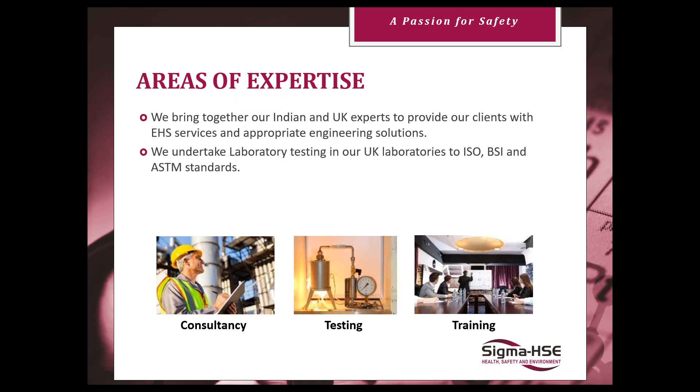So that's where we are. What do we do? We're basically experts in anything to do with process safety, so that's consultancy on all aspects of process safety. But we also have the luxury of having test laboratories, accredited laboratories, for really getting to understand the flammability and combustibility characteristics of gases, liquids, vapours, and combustible dusts. We also have the capability of doing chemical reaction hazard testing, so calorimeters, DSCs, ARC, all of that sort of stuff. And that feeds into the consultancy arm with the advice we can give to operating companies. We also do a fair amount of bespoke training for companies on many different aspects of process safety, including fire and explosion, which is the subject of today's presentation.

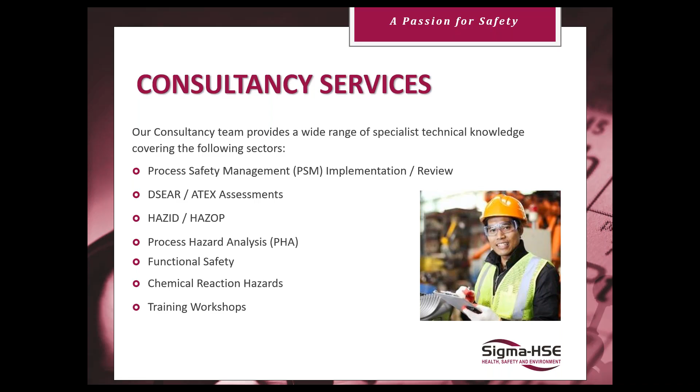So you can see from this slide the sorts of things that keep us busy, earn our money, and hopefully make the process industries a safer place to work, and of course complying with the necessary legislation. As I've said, we have this luxury of having the testing laboratories, so fire and explosion properties of all types of substances. We're also experts in electrostatic properties, so we can determine resistivities and look at electrostatic ignition probabilities and all that sort of thing. So we do tend to be able to help industry in quite a large way.

So, what we're trying to do here today is give you some information on this subject called Hazardous Area Classification. This subject is all to do with trying to prevent or manage substances and processes that can burst into flame or explode. Okay, that's what we're trying to do.

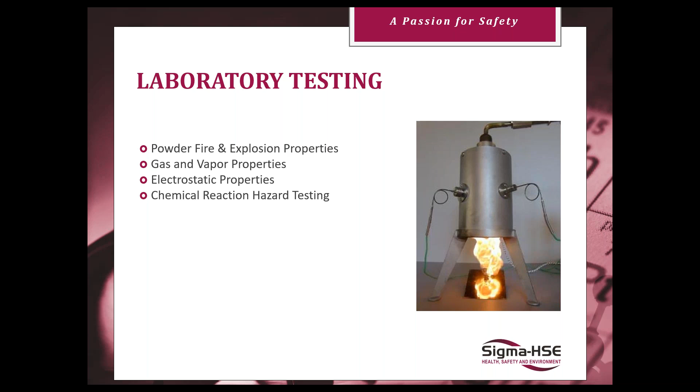Just a couple of examples, because you'll all be familiar with the fire triangle. So before something can burst into flame, we need a fuel. We also need air or oxygen, and those need to be in certain proportions to create this thing called the flammable atmosphere. Within Europe, we talk about explosible or flammable atmospheres, and it's this mixture of fuel vapours with air.

That fuel, of course, can be either vapours from liquids, gases, or combustible solids in the form of dust clouds. The third part of the triangle is an ignition source. So just like with all of these triangles, if we can take away any one of those 3 points, either fuel or the air or the ignition source, then we don't burst into flame and we don't have the potential for explosion.

Piper Alpha is just one example, which you'll no doubt know all about as process safety professionals. One of the things was a deluge system was activated by the gas leak, and this resulted in the ingress of deluge water into a light fitting, which was a protected light fitting, but because we had ingress into it, it was no longer explosion proof. We got an electrical short circuit and the generation of a spark. Now, I'm not saying this was the only potential ignition source for Piper Alpha, but it's just an example in relation to the topics we've been talking about.

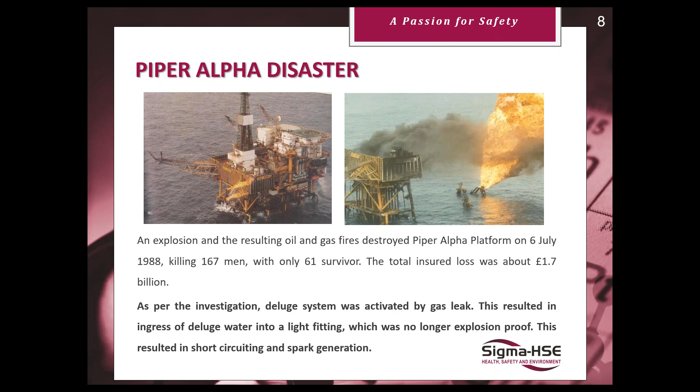Another one, especially our American audience will understand, is the Danvers plant explosion back in 2006, where essentially we overheated a flammable liquid because we left the steam on inadvertently. That generated vapours. The ventilation system had been isolated, but it's very difficult when dealing with fires and explosions to ensure we eliminate all potential ignition sources all of the time. So under such circumstances where you've got this flammable atmosphere present, eventually, given sufficient time, it's likely to come across an ignition source, and we have the confined vapor cloud ignited by a non-rated fan, resulting in the consequences of that serious event.

So what we're trying to do in hazardous area classification is try to prevent this from happening. These are serious things, so you can envisage that there is legislation present within our nations to deal with these sorts of events, to try and prevent them in the first place, or if they do occur, ensure the explosion or fire isn't as bad as it could be. What we're essentially trying to do is break that fire triangle in its simplest form.

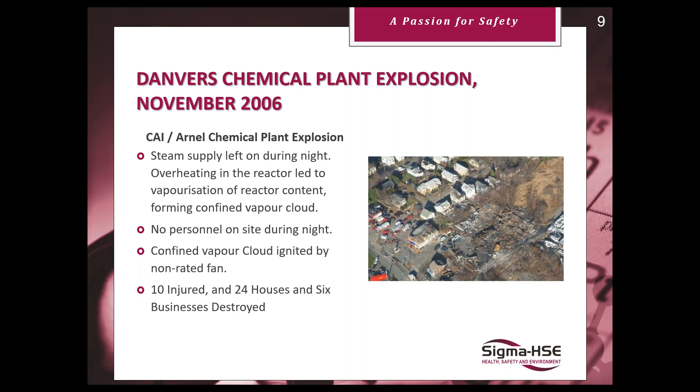Within the UK, we have a set of regulations called the DSEAR regulations, standing for Dangerous Substances and Explosive Atmosphere regulations. These are substances classified as flammable or combustible, and if they mix with the air can produce this explosive atmosphere.

What the regulations essentially require us to do is carry out this thing called a hazardous area classification, to determine where we can get mixtures of fuel vapours or fuel dusts with air, and how big those flammable or explosive atmospheres could be. We'll talk later about what's called the extent of the flammable atmosphere. Basically, the system is built on a yes-no answer, which says if a flammable atmosphere is present, then that's a hazardous area, and we define that as a zone within the UK and Europe. Outside of that area or zone, where the flammable atmosphere is below the explosive concentrations, it's non-hazardous.

So we look at where we can generate mixtures of fuel and air, and sometimes that'll be internal to equipment, for example within a storage tank containing a flammable liquid with a low flash point. If it's an atmospheric storage tank and open to the air, then as we draw off liquid from the tank, we'll be drawing in air, which will mix with the vapours given off from the liquid surface, so we'll have a flammable atmosphere.

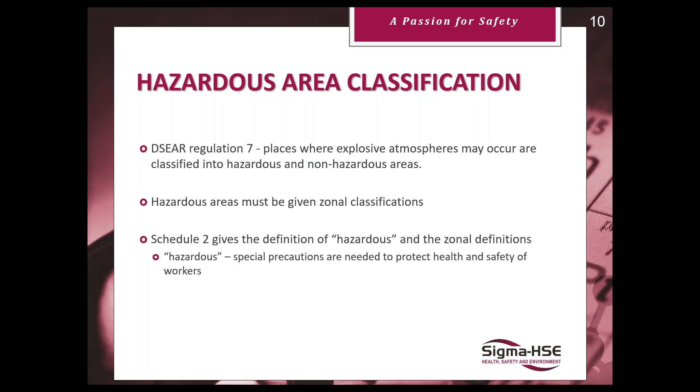In the US, there are really two overall guiding documents: NFPA 497 for any time you're handling a flammable liquid, gas or vapor, and NFPA 499 if you're handling a material that has the potential to result in a combustible dust cloud.

If you know your process has these materials, you're required to go through and apply the NFPA code and determine if this area is classified. If so, per the requirements within NFPA, you're directed to NFPA 70, the National Electrical Code, which has specific requirements based upon the classification you derive through the methods within NFPA 497 and 499.

It will dictate what you need to do for an installation within whatever you've determined that area to be classified for it to be a safe installation.

It's a lot more judgment calls and best understanding of processes, as opposed to a yes/no list-based process. It involves a holistic approach of looking at process, size of process, potential leak points, what the material itself is, does it have exceptionally high ignition energy requirements, or is it something that can ignite really low. You go through, make these adjustments, find what NFPA recommends as a classification zone, and then apply that to your process.

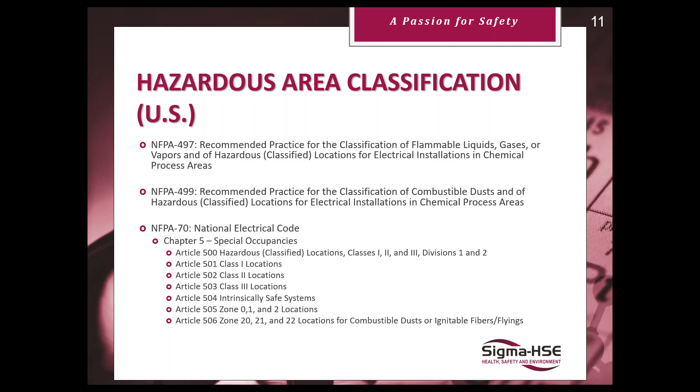The only time we won't have a flammable atmosphere within that tank is if we have a cold snap and the temperature of the liquid falls below the flash point.

But outside of that, around the vents, for example around the PV vent, that will most probably only be giving out vapours when we're filling the tank, when we push those vapours out. So in normal operation we expect those vapours to come out of there, but once it's static and we're not loading or unloading from the tank, we'll be in a static situation.

And then we have what's called another zone outside, which is essentially related to if we overfill the tank or spill the tank or whatever.

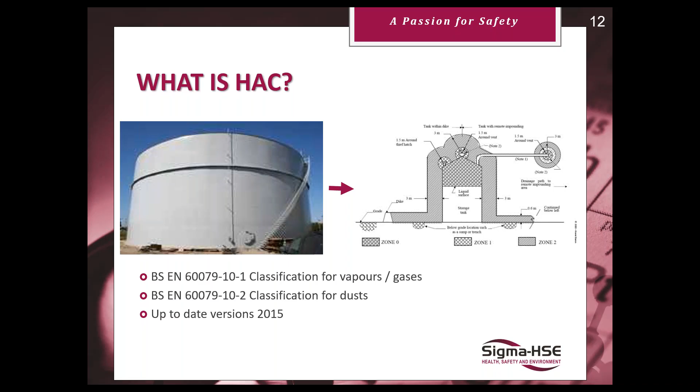Now, we've already talked about what the flammable atmosphere is. It's this mixture of vapours with air, and they've got to be within the proportions we know about, being the lower explosive limit or the upper explosive limit. So if we've got insufficient air, we're too rich to burn, we're operating above the UEL, the upper explosive limit. If we've got too much air, because ventilation is very good or whatever, we could be operating below the LEL.

So we've got liquids that can generate vapours primarily due to temperature on the flash point, or we can do it from a vapour concentration point of view. But obviously, as we all know, those limits can widen as the temperature increases. Okay, and that's all that is illustrating.

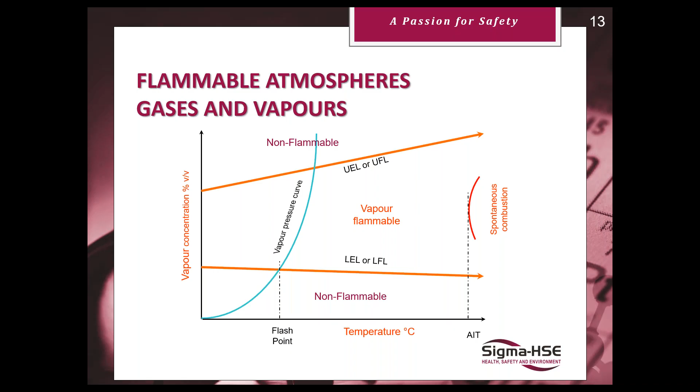Now, to be able to do this job properly, we need to understand properties of the substances we're dealing with. When we're talking about gases and vapours, these are the sorts of data that we need to understand. So flash point for liquids or gases, the flammability limits, the auto-ignition temperature.

Similar to the flash point is ignited by a flame or spark ignition, where the auto ignition temperature is a hot surface effect. So the auto ignition temperature is a lot higher generally than the flash point, often in the hundreds of degrees C. The gas group - we tend to classify various gases and vapours into one of three groups.

But this really relates to the ease of ignitability, or the minimum ignition energy necessary to be able to ignite certain substances. And of course, if we're looking at where our flammable atmospheres can be, then vapor density is important.

So when we're doing our hazardous area classification and developing those drawings, if we're dealing with a buoyant gas like hydrogen, for example, any release of hydrogen will be buoyant, will mix with the air, so the flammable atmosphere will be buoyant and go up. Whereas for solvent vapours, typical industrial solvent vapours, the vapour density will be heavier than air, so they'll tend to sink to the ground. So of course that will impact our hazardous area classification.

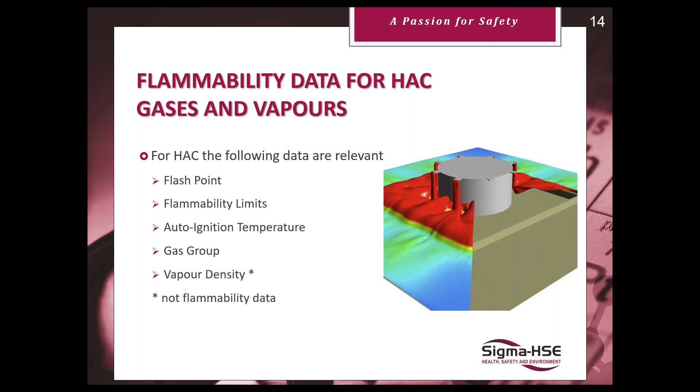Now, I've talked about gases and vapours, but of course powders or combustible dusts can burst into flame or explode. But generally, if there's good mixing, good suspension in air, clearly, just as with vapours and gases, we need to have a powder that is capable of acting as a fuel. And by that I mean it's capable of reacting with oxygen, because that's really all combustion is.

An ignited event is a combustion reaction. All combustion reactions are the same - it's the material reacting in oxygen. So if that material is already fully oxidized, then it won't be able to react with oxygen, it'll be inert. Something like chalk or sand or cement, fully oxidized substances, cannot form a flammable or combustible cloud.

The concentration's got to be within explosible limits, what we call the minimum explosible concentration of dust in air, very similar to the LEL and the UEL. But because we need that suspension in air, what we found is that we need to have a particle size distribution of the powders to be less than 500 micron. Less than 500 micron has an effect on the reaction dynamics of the combustion reaction. It also has an effect on its capability of generating a dust cloud, getting this intimate mixture with the air.

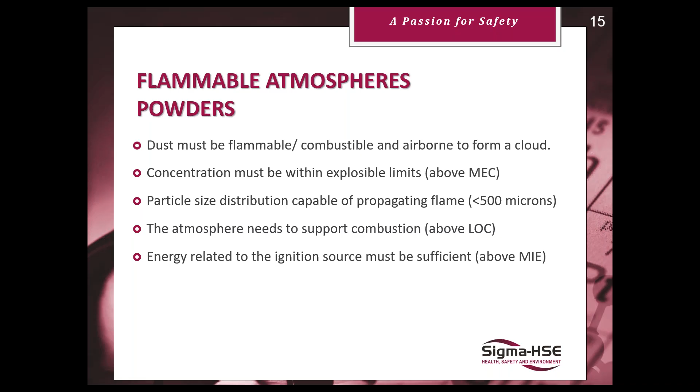But for combustible dust, because it's very particle size dependent, really it's testing. We can't really calculate the flammable atmospheres and things like that. We need to actually do the testing itself to get that sort of information, which is what's illustrated here. So we have tests where we can determine whether or not a powder will be combustible.

That's known as the AB classification, where we create a dust cloud and put a very large energy source through that dust cloud and see if that will explode or not. We can determine the minimum explosible concentrations, particle size, the minimum ignition temperatures of both a cloud and a layer of powder, and its electrical resistivity. So these are just some of the tests that we typically use to get an understanding of the substance, as to how likely it is to form a flammable atmosphere and how easily it can be ignited.

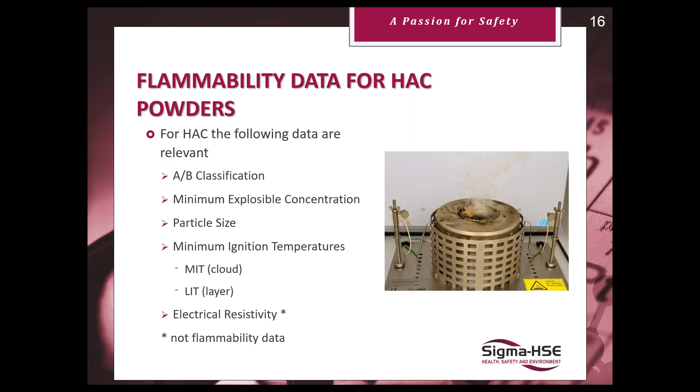And again, there's guides out there for us. There's a standard, another part of the standard that tells us about this, you've seen these before, I presented them before, but there's also industry codes as well. So the Energy Institute in the UK, which is essentially looking at the storage and safe handling of highly flammable liquids and liquid fuels, Model Code of Safe Practice, Part 15.

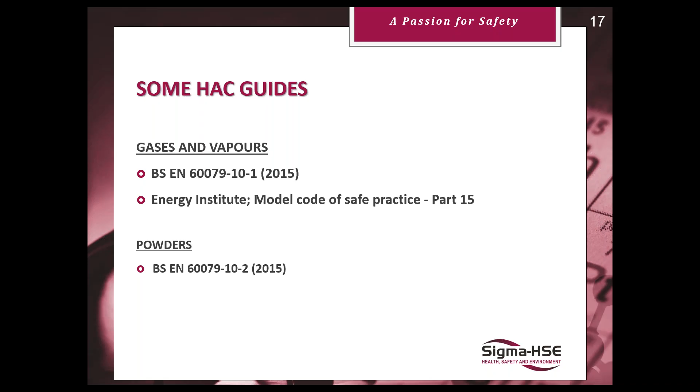You'll have similar things in the States, which Andrew will take you through now. Yeah, again, within the States, the majority of all the information is contained within the NFPA requirements. I'll walk you through for gas and vapors in 497, definitions, classifications, provide you with those example diagrams, and then give kind of explanatory material walking you through why those diagrams may apply to your process, or if you know there's a reason for it not to apply and something else will be helpful.

And then again, it directs you to NFPA 70, which will tell you, all right, you're going to have electrical installations in these areas that you've determined need to be classified. Here's what you need to do to ensure that those electrical installations don't provide a potential ignition source. And then it's an identical process for powders with NFPA 499 instead of 497. And again, pushing you through to NFPA 70 and the specific requirements.

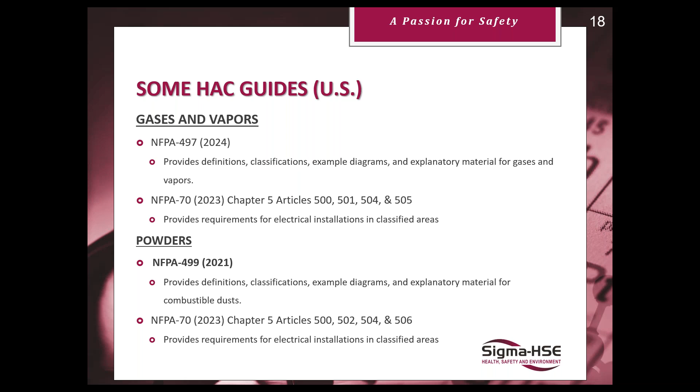Okay, so you can see it's very similar. So, what are we trying to do? What's the philosophy behind this hazardous area classification? We're talking about zones, and I've said before these are risk-based zones, because we're looking at the probability of a flammable atmosphere occurring simultaneously with the probability of an ignition source being present at the same time.

So, if you like, from a risk point of view, what we're trying to do is reduce the risk of having an ignitable event, and that risk is a combination of the likelihood of having a flammable atmosphere present and the likelihood of having an ignition source present at the same time.

So therefore, clearly it means that if we've got a flammable atmosphere there present continuously, like for instance in the headspace of a tank with a low flash point liquid in an atmospheric storage tank, then because the flammable atmosphere is there practically continuously, most of the risk reduction comes from reducing the probability of an ignition source being present.

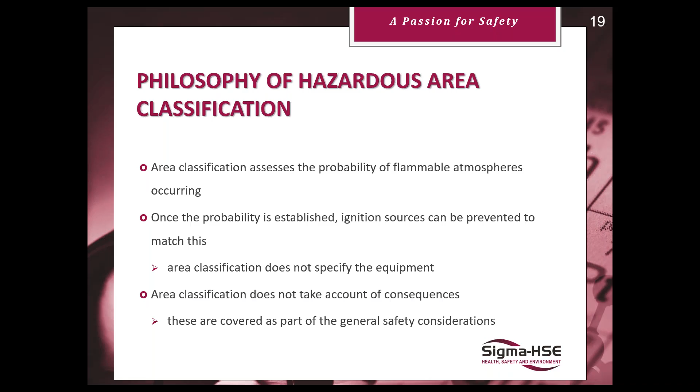So what's the approach then to actually determining these zones? We've got to find out, we've got to understand the materials we're playing with, whether or not they're capable of bursting into flame or explosion and how easily, but we've got to identify where these flammable atmospheres can be. Generally they can be either inside equipment, or if equipment fails, we have leaks or spillages. So we need to identify these sources of release.

Any vapours released from those sources will be dispersed due to ventilation characteristics, either natural ventilation or specific forced mechanical ventilation. Our next task is to determine what we call the grade of release.

Is that flammable atmosphere there continuously? Is it there in normal operation? Or is it there infrequently? Or you can think about it another way.

Continuous is obvious, something like a flammable liquid being present at temperatures above its flash point in a containment system would be continuous. A vent, for example, will only generate that flammable atmosphere when the vent is in operation. So when we're filling the tank, we'll be pushing vapours out from that tank. When we're emptying the tank, sending it off to process, we're pulling air into the tank.

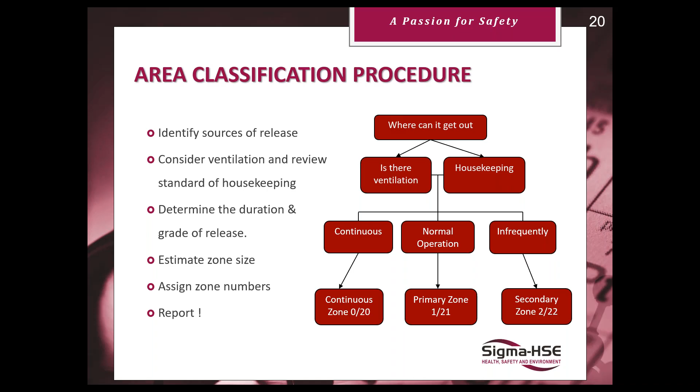And Andrew will now illustrate how that's done in the US.

So in the US, the start of the process is the same. You're looking at your process and you want to know where is there the potential for there to be a release of combustible material. And then you go and you gather information on the facility history and the process information.

Facility history, you want to look at, is there a tendency for there to be leaks during maintenance activities? Is there a high rate of spillage? Is there anything in the historical documentation of this facility that leads you to believe that releases are going to be more likely than they would be on the average?

And then within process information, you want to look at volumes of materials being handled, pressures that the process operates at. Is it a high pressure? In that case, it's going to be a larger zone than if it's a low pressure or an open system. You want to look at flow rates and all of your process parameters, and that will help you dictate what makes sense for our zone.

Then you go and there's the classification diagrams listed in NFPA, and you compare release source and your process details, and you make sure you find one that matches. And then you match up your diagrams looking at your likelihood of ignitable mixture being present, your potential for combustible material to be transported further. If you have trenches, pipes, conduits, ducts, something that can travel that combustible atmosphere away from the primary leak source, you want to make sure that you're using a classification diagram that represents that as well.

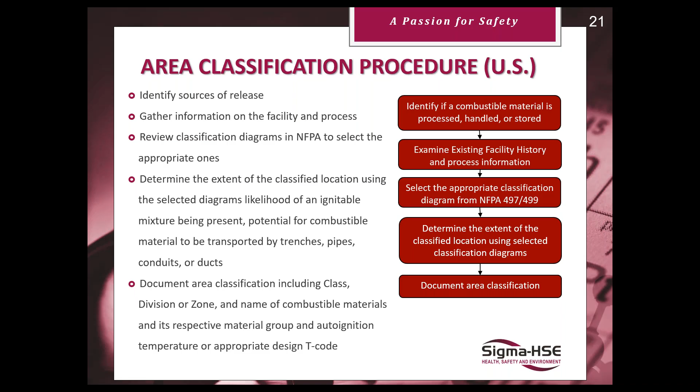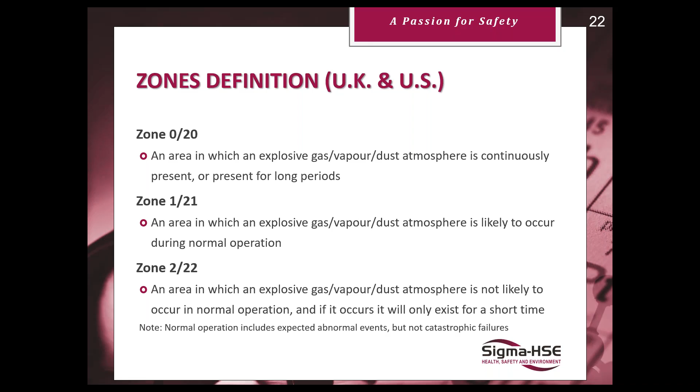And as I've already discussed the zonal classifications before, this just gives the proper definitions present within the standards, but hopefully you can see we use the same system in the UK or indeed in the US if we're talking about zones. But in the US we have an additional definition which Andrew will take you through.

Yeah, so US started with class and division before adding the zones. That's a relatively recent move to become a little more in line with European, but most places still use a class and division system. It's fairly simple.

Class 1 is going to be explosive gas or vapor atmosphere, and division 1 is going to be present during normal operation. Division 2 is under abnormal conditions. So it lines up a little bit with the zones, but rather than having the 0, 1, 2, division 1 kind of encompasses your 0 and your 1, but it's a different requirement technically. So if you've got something that's classified for a zone and you're using a division, it doesn't quite line up.

You need to make sure your equipment is Class 1, Division 1 certified, and then same with Class 2 for normal operation, or there being combustible dust present that could be stirred up. You've got an eighth inch thick layer on, say, the ground of your shop around your routing machine. If someone were to step and stir that dust up and there's an electrical spark in the area, there's the potential for ignition.

And then your Class 2, Division 2, it's only likely during abnormal conditions. So this would be if you've got a secondary event occurring, or there's a failure and a release during a maintenance activity, then you would expect to see your dust there. It's just a different way of viewing it as opposed to the zone method. But I think as the US moves forward, they'll probably end up stepping away from classes and divisions and moving more towards the zones in the future.

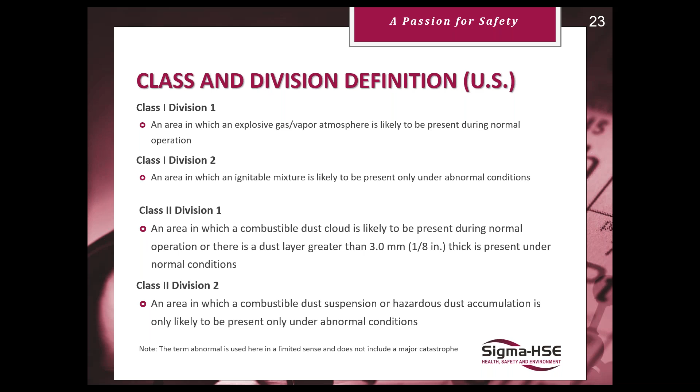So just to reiterate, we've got these different types of grade, whether the explosible atmosphere is there continuously or very frequently or for long periods, whether it's periodically there or on occasion during normal operation, or we only expect it because we're having leakages or spillages or some form of malfunction, this sort of thing.

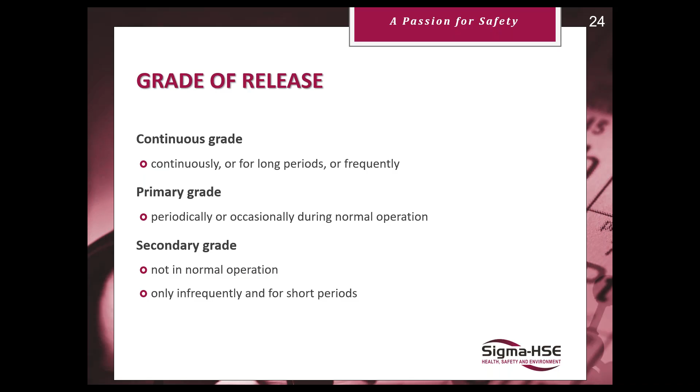And again, very similar in the US, although there appears to be some form of quantification to the volumes of materials. So within the US, we don't really look so much at grade of release as opposed to a size, pressure, flow for the process involved, and let that kind of dictate some of our volumes. We have the similar approach of combustible atmosphere always or expected present during normal operations and then occasional, but it doesn't feed in as much as your process equipment and piping details that will directly impact which methods of classification diagrams you're going to be looking at.

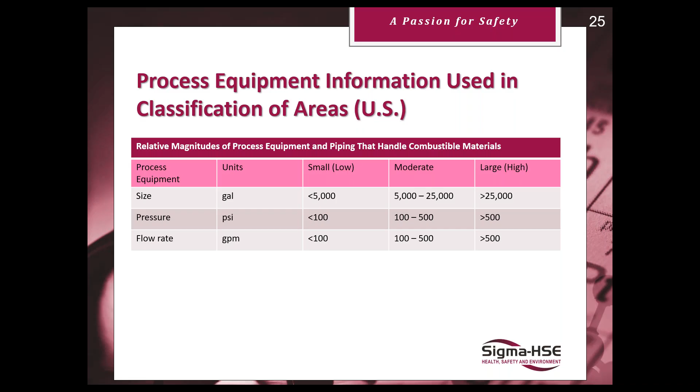So actually defining the zones is pretty easy once we've got an idea of the grade of release, because the grade of release determines what the zone is. The only thing that changes the extent of that zone is if ventilation is there and it's good and it has good dilution and it has good dispersion characteristics.

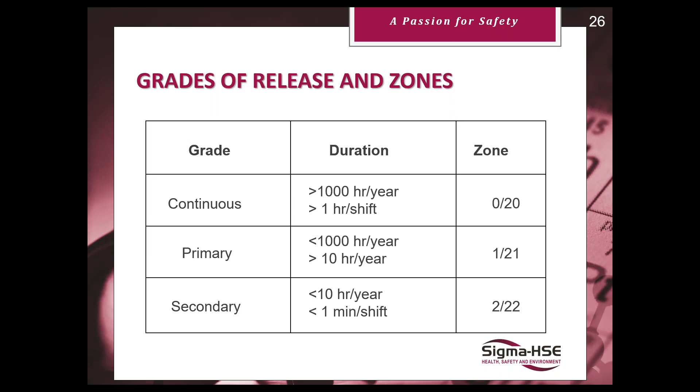So, for example, over an open container of flammable liquid where it's a continuous grade of release, if I've got mechanical local exhaust ventilation that's been designed where the airflow effectively reduces the vapor concentration to less than 25% of the lower explosive limit, then it remains a continuous grade of release, but the zone extent can be what's known as negligible extent. So the size of that flammable atmosphere is reduced down to a very small volume by virtue of having good ventilation and good availability of ventilation.

But there are different ways of determining the extent of the zones, the size of these flammable atmosphere zones. The easiest approach is the example approach. So that diagram I showed you before of the atmospheric storage tank with the zones around it, that exercise has been done by the industry and that's the accepted way. So you can simply, if you've got an atmospheric storage tank within a bund or a dike, and it's a low flash point material, your hazardous area classification is as simple as just taking that out from the standards or the guidance that's available and using that. You don't need to do anything else.

But there are calculation methods as well that can be used where you can determine things called release characteristics, where you can actually calculate or in fact use consequence modeling software to determine the extent of a flammable cloud, its shape and so on and so forth. So there's different ways of doing it. The simplest, though, is if it's already been determined by somebody else, is using that. And a lot of the guidance in Europe and in the UK has already got hazardous area classifications around typical pieces of equipment, mixers, pumps, vents, tanks, reactors, things like that, already being done. You just need to check that your situation is essentially identical to the situation of the example that's given.

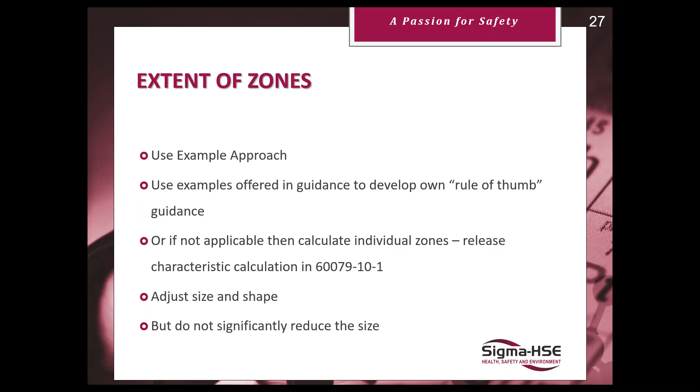Within the US, we don't currently have that calculation option. It's all going to be based on diagrams and best understanding of the potential releases, considering what the material is, the vapor density of the material - is it lighter than air, heavier than air? What the LFL is, your process or storage size, the size of your release, and your ventilation. Then you apply the diagram method and adapt that to what your facility needs and looks like.

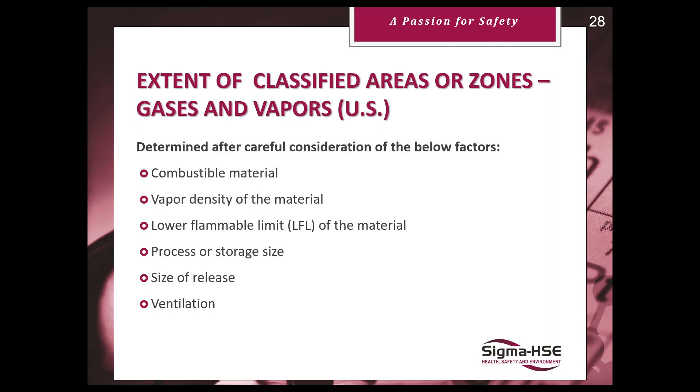We've got exactly the same sort of thing for dust. It's more difficult to calculate, but you can use the knowledge from when some of these events have happened. For example, if you drop a 25 kilogram sack of powder on the floor when charging it, to get the extent of the zone 22, you simply visually look at how far the dust has been deposited - is that 1 meter, 2 meters, or 3 meters?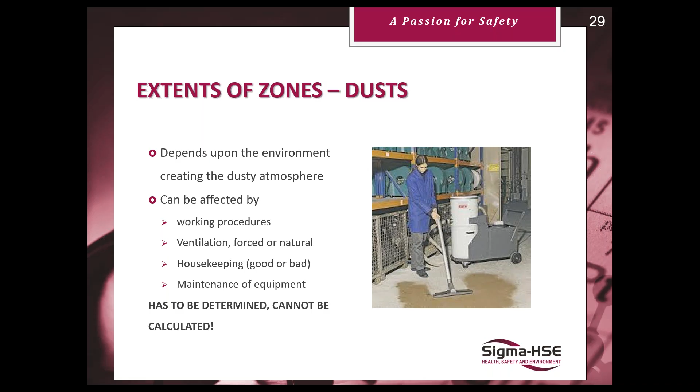It's more difficult to do from a calculation point of view. It can't be calculated - we need to use other sorts of extents.

The process for dust zones within the US is similar to vapor and gas. What affects your zone changes though - you're still looking at properties of the material, but now you're adding bulk density, particle size, particle density, what pressure it's stored at, and the size of a leak opening. Is it a release in the side of a super sack? Is it a pressurized pneumatic conveyance system with a pinhole, or a slightly bigger leak at a transfer point with a flex connection? How much can be released? Do you have dust collection in the area? What's your housekeeping process, and what's the potential for a hybrid mixture - do you have combustible gas and vapors mixed with your combustible dusts? Because that requires a different type of classification.

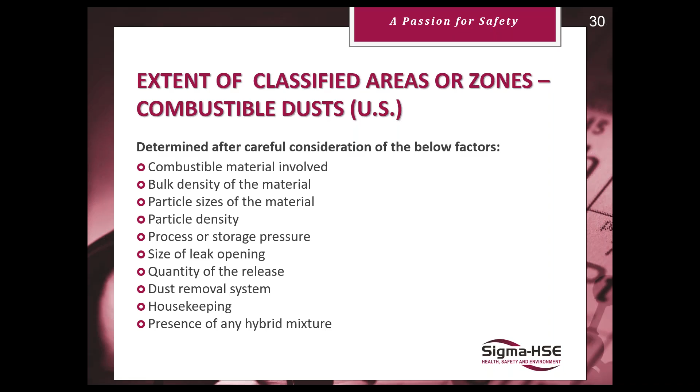Ventilation obviously has an impact on the size of a flammable atmosphere and the sizes of those zones. You can use high ventilation rates to reduce that zone down to negligible extent, meaning you don't need to provide any protected electrical or mechanical equipment in there. But we also stipulate, from a dilution point of view, that there's sufficient air to dilute those vapors or dust clouds down to a negligible extent.

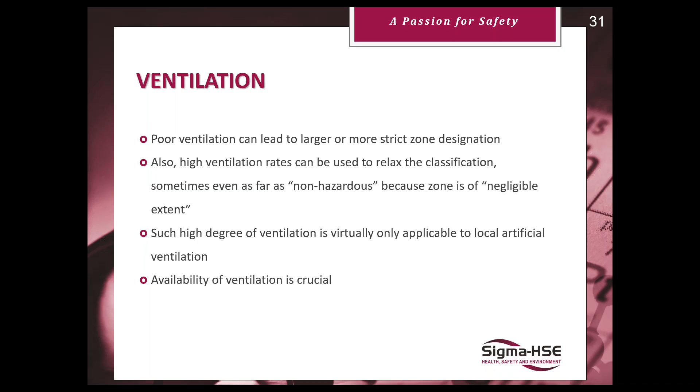We also have a thing within ventilation we need to look at called the availability of the ventilation, which means: is the ventilation always on? If it's not always on, or not performing to achieve the performance standards we want, then the process doesn't run - there are interlocks in the system and this sort of thing. There are tables in the standard; it's detail I don't want to go into today, but obviously ventilation has an impact.

So just to summarize this bit: within the UK we look at zones, which is the move that's starting within the states. You're starting to use zones, although you're still using classes and divisions, which is fine, but effectively it's doing the same job.

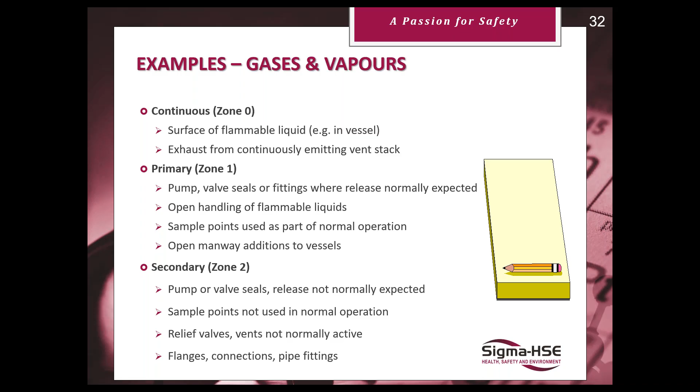These are just examples of when, once we know that grade of release, it determines our zone. It's a similar sort of thing for dust - these give examples of where we'd have a continuous grade of release for dust for a zone 20. Generally, for all intents and purposes, it will always be within the internals of equipment, and secondary zones because we're spilling stuff or having leakages from pneumatic conveying systems or this sort of thing. It's no different.

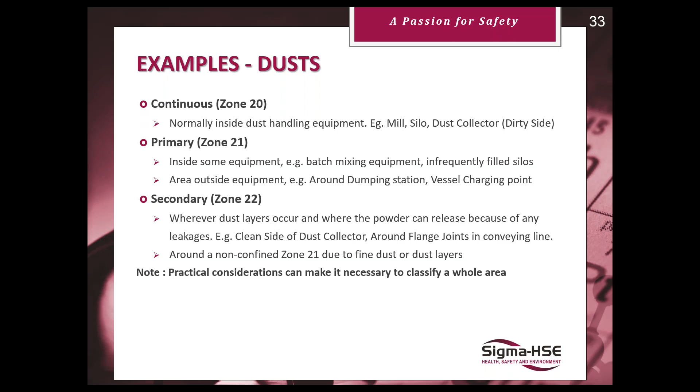Hazardous area classification is important, and within the UK and Europe, the standards require us to produce what we call zone drawings. As I said before, because vapor density is important, that will impact the drawing, so we tend to produce these drawings in both plan and elevation modes.

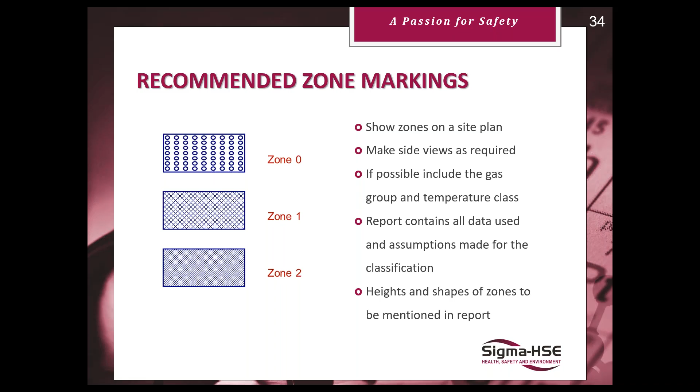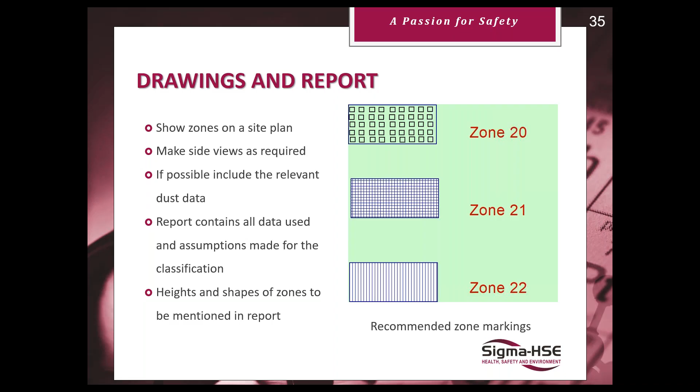We can put those on, and then those are useful out in the processing operations for your operators to ensure they know where the zones are. But there's different ways of doing it. You can start painting lines on floors and things like that. There are specified recommended zone markings for the different types of zone. The standards require that they're used, but really it doesn't change the extent.

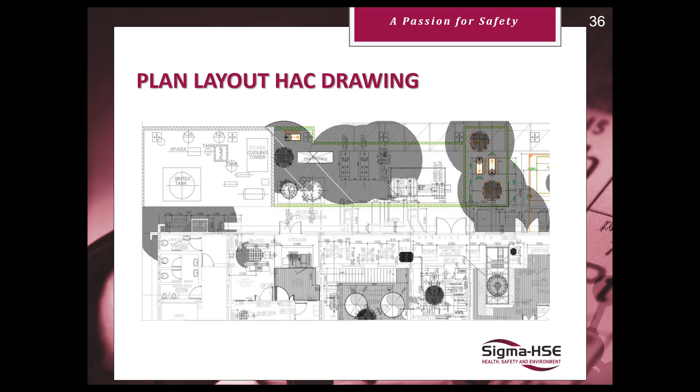Right at the start we talked about, once we've got these zones, then we're saying within that zone that is hazardous. And if we have an ignition source within those zones, we can burst into flame or explode. And therefore, within those zones, any equipment needs to be protected. That's where we'll be moving on to very shortly.

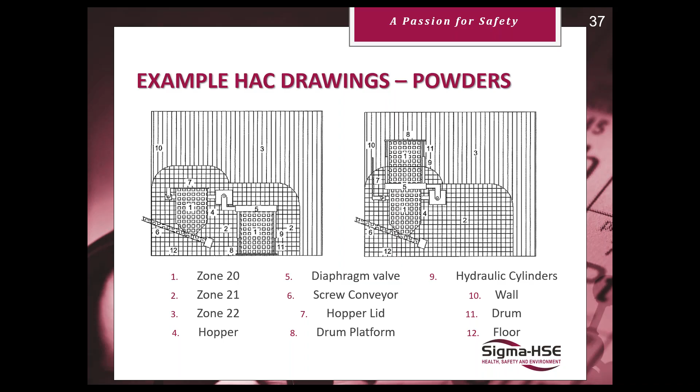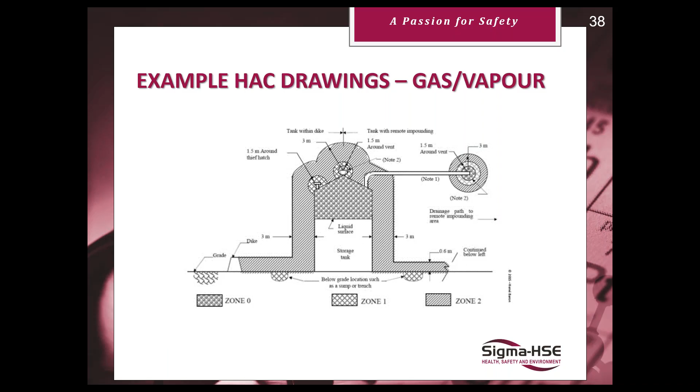So once we've got these drawings, once we've done our hazardous area classification, we can then decide, is there any equipment present and is it appropriately protected to reduce the probability of that equipment acting as an ignition source.

And clearly, once you've done one of these reviews, within the legislation in the UK, you're expected to review those reviews every now and then. So obviously, if changes occur on the plant, you're putting in a new process, or you're changing one of your substances, or going from a granular product to a finer, dustier product, you'd be expected to review your hazardous area classification document appropriately.

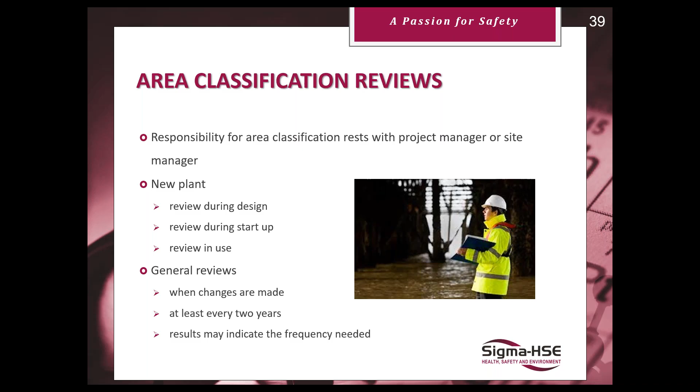But once we've done that, once we've set up our hazardous area classification, then we've got to make sure that any electrical or mechanical equipment that's present within those zones needs to be specially protected.

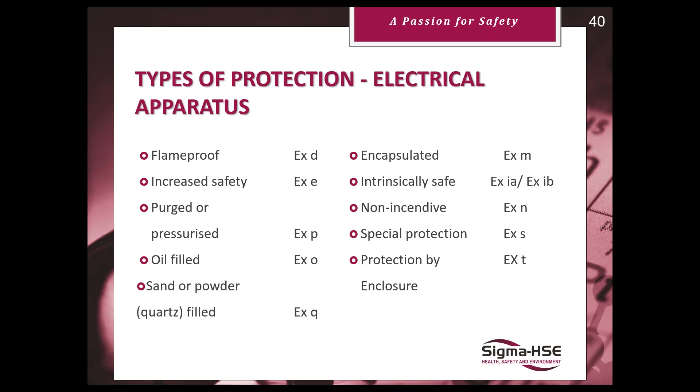Now, there's different ways of skinning a cat. There's different ways of building electrical apparatus or mechanical equipment that can ensure that the flammable atmosphere is not ignited. Typically in our industry, you'll all have heard of flame-proof equipment and intrinsically safe equipment, but there's different ways of doing it. Some of these are only applicable to specific zones. Certain equipment can only be used in certain zones, while other equipment can be used in all of the zones.

That's all associated with the spark ignition source of that equipment - how it's built to try and avoid the flammable atmosphere coming into contact with sparking equipment. But you've also got to remember that hot surfaces can also ignite vapors, gases, and dust clouds. You can build electrical and mechanical equipment that only generates maximum surface temperatures, and provided those temperatures are below the auto ignition temperature or the minimum ignition temperature for dust, then it's safe because that equipment can't impart sufficient energy.

Now, when we're dealing with dust, we talk about a maximum surface temperature, maximum allowable temperature, and we quote that as so many degrees C. For vapours and gases, we work on temperature classes. So we've essentially taken the range of potential temperatures and grouped them into 6 classes, T1 to T6. We can take the information from the auto-ignition temperature and pick the appropriate temperature class.

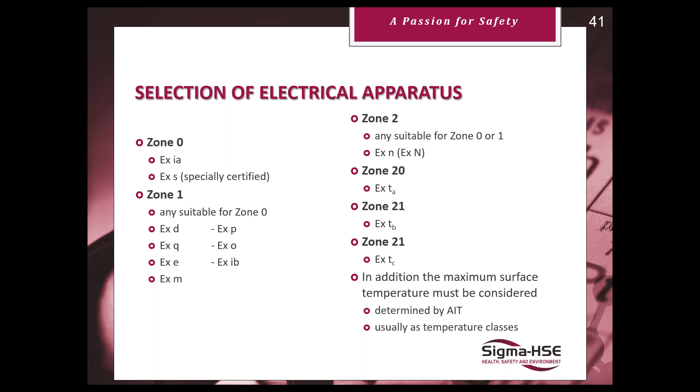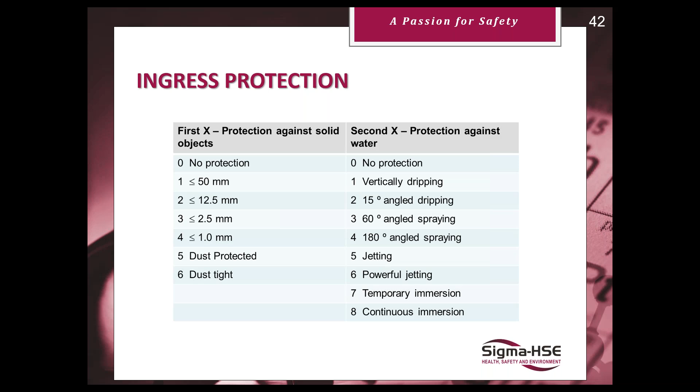There are other methods of doing it, one of which is called ingress protection. This is essentially sealing the potential sparking components within an enclosure that is capable of not allowing the flammable atmosphere into it. So if we've got an ingress protection of say 65, that means it's dust tight, and it also won't allow water in from a water jet, for example. There's different forms of ingress protection that we can get, and that's illustrated in the next slide.

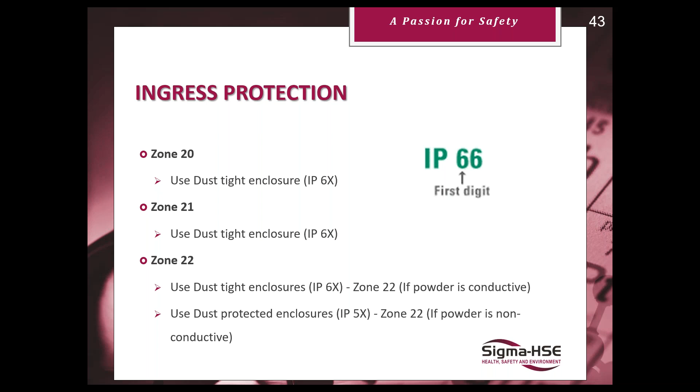Once you've got your equipment back and you're going to install it, the nameplate and the piece of paper that comes with the equipment has markings such as this. The first two can be ignored because they're associated with the notified bodies and the people who manufacture this sort of equipment.

The rest of the information relates to how these directives were developed, by committees of experts. In the ATEX directive, there were two committees: one looking at protecting workers from fires and explosions involving dangerous substances, which is the subject of the DSEAR legislation, and the second looking at the people who manufacture this special protected equipment.

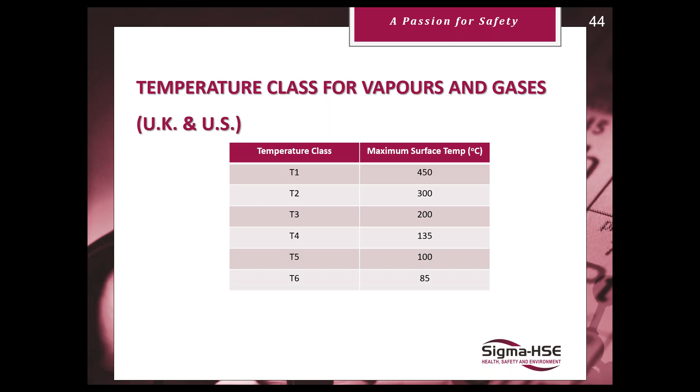The rest of the markings are to do with the temperature classification, T4, which was within that range on the table shown previously. So T4, the maximum surface temperature that equipment can produce due to its manufacture, is 135 degrees. That's saying basically that the auto-ignition temperature of the gas or vapour involved here is greater than 135 degrees C. The Ex d tells us the type of explosion protection.

The equipment categories come in three categories: category 1, 2 or 3. Category 1 equipment is used where the probability of it acting as an ignition source is extremely low - basically the equipment cannot act as an ignition source under normal operation, under expected malfunction, or under rare malfunction. Whereas a category 3 piece of equipment won't act as an ignition source in normal operation, but could if it malfunctioned. Of course that relates to the zone.

It's all right having an electrical piece of equipment that is category 3, because that's for zone 2 or zone 22. But remember, under those zones, the flammable atmosphere is present on very rare occasions or for very short periods of time. So the likelihood, from a risk point of view, of having the flammable atmosphere present simultaneously with the ignition source reduces the risk down to a level that we're happy with.

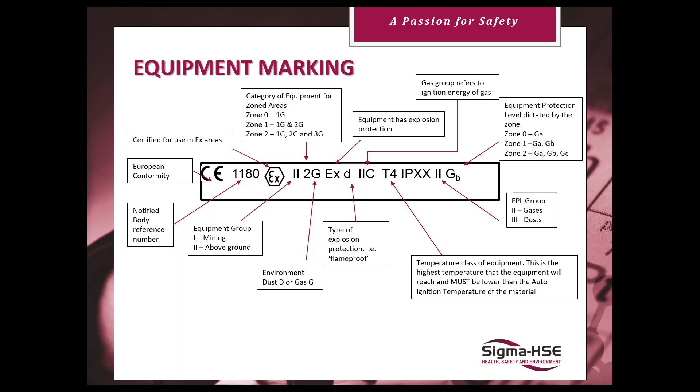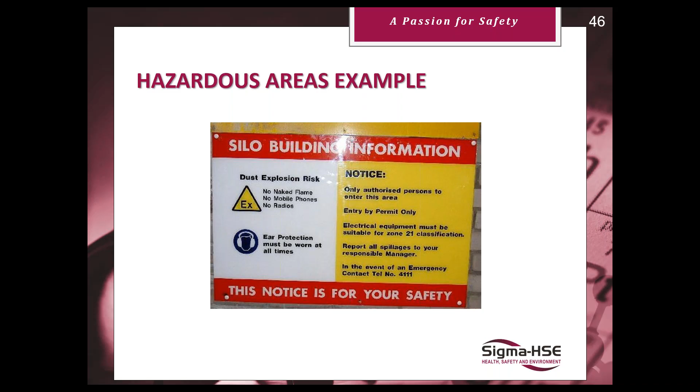So hopefully that's the end of the slideshow. I'm sorry we've gone beyond an hour. Hopefully you've found it interesting and useful. I think you've also found that although the language is different between the US and Europe, the intent of what's required and the precautions necessary are very, very similar.